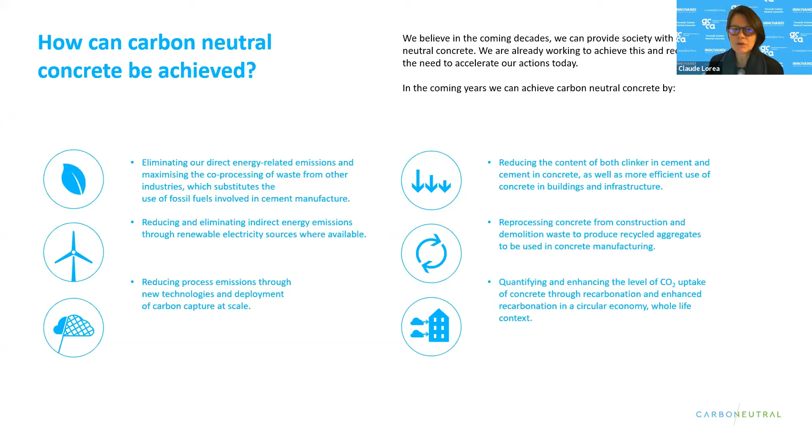Now, recarbonation is something on which we have a lot of research available. Research first, because in fact, recarbonation is an issue that structural engineers have been fighting for decades. So the mechanisms of recarbonation are really well understood, and actually it is something that we wanted to prevent because that could lead to destroying the concrete structure.

And then more recently, there was what I see as a breakthrough article in geoscience, this one showing substantial global carbon uptake of concrete through recarbonation. And I think this is actually the article that triggered the sector to say, well, we have to quantify this and we need to get the numbers right, but we also need a methodology to quantify, a methodology that will be recognized internationally. So the idea was to put together a bunch of scientists to develop a methodology that is compliant with IPCC methodologies and that would be accepted by UNFCCC as recognizing the amount of CO2 that is reabsorbed by concrete.

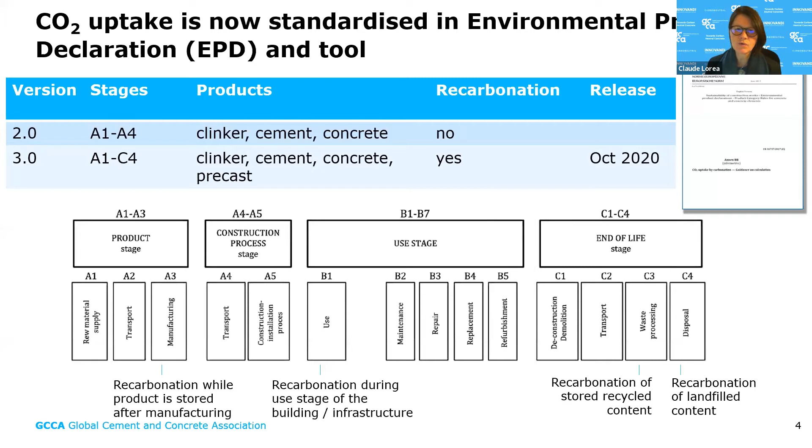So when there is CO2 which is reabsorbed by the concrete, and finally even maybe when concrete is landfilled, which is obviously something we want to avoid. And this is really where we can speak about enhanced recarbonation. So in our roadmap, and we are obviously working on this, it's about increasing the amount of CO2 that can be reabsorbed at the end of life of concrete. And there, concrete recycling is obviously essential.

Now, how does it work with IPCC, and what are we doing here? So the objective, as I said, is to have this recarbonation phenomenon recognized in IPCC, which is the reference for CO2 emission reporting at country level and at global level as well. And it's different, obviously, than having it recognized in an EPD. And we need to ensure that IPCC endorses the methodology so that what we have defined is credible.

So a project was co-financed by Cementa AB, CEMBUREAU, PCA, initially the World Business Council for Sustainable Development and the CSI initiative, and this project was taken over by the GCCA. And I've just made here a quick calculation to show how important that issue potentially is for our sector.

The cement and concrete industry stands today for about 7% of global CO2 emissions. I know there are a lot of numbers out there, but I'm following closely emission inventories and so on, and I published a LinkedIn article last year, and I'm about to publish a new one, and I stick with my 7%.

So we represent 7% of global CO2 emissions. And if we assume that 60% of this is process emissions, then the current uptake is slightly below 1% of total global man-made CO2 emissions. So it is important, but it's important as well that we calculate this right.

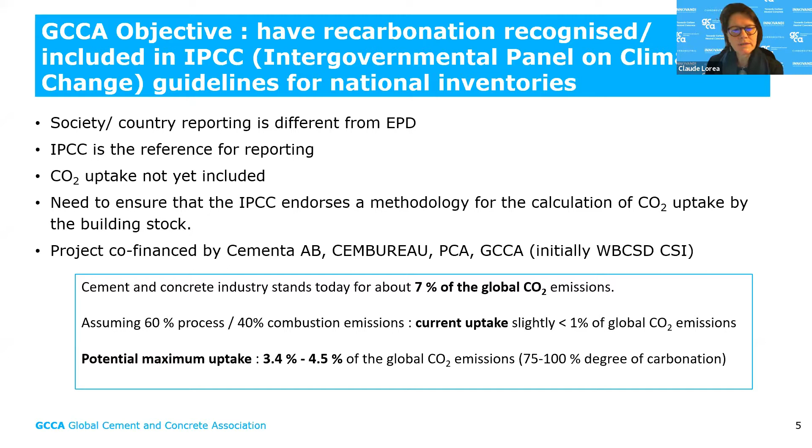The potential maximum uptake is obviously way higher because theoretically we can achieve a 75 to 100% degree of carbonation, because we know that this reaction can completely go the other way around. So the potential maximum uptake is absolutely huge, is more than half of the 7%. So very important issue. So how is IPCC reporting structured? So that's quite important to understand.

So in the IPCC report, the countries will report their emissions and they will report their removals. So in the emissions, they have to report for cement industry separately process emissions and combustion emission. And what I have not highlighted yet is that actually the recarbonation happens in relation to the process emissions. So it's not the combustion emission where the CO2 is reabsorbed, it's actually for the process emissions that we have this phenomenon of recarbonation. This is the inverse reaction of the one that is happening in our kiln, in simple words. And actually those two sources of emissions are reported separately in IPCC guidelines.

This is actually one thing that also leads to a lot of confusion about those 7%, because most people only look at our process emission, or only look at our combustion emission, and not at the whole story. And there basically, we need then to link the recarbonation to the process emissions. And the intention is to do that under the reporting item removals, because it's actually a removal of the CO2 from the atmosphere that is happening.

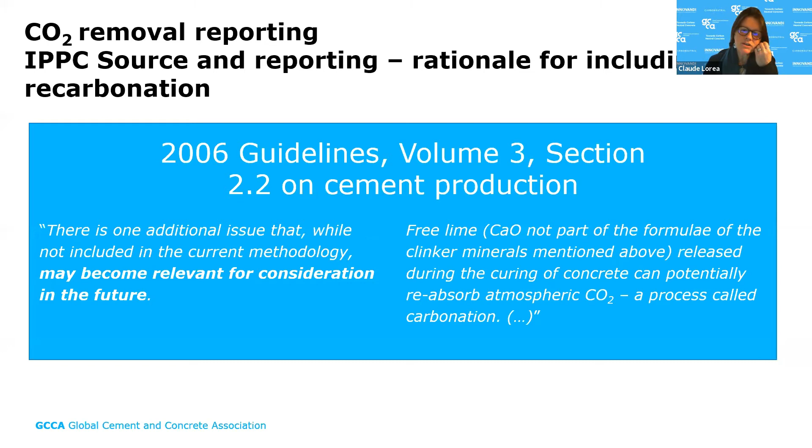And the famous IVL report, which we have had developed in this project, actually offers the 3 tiers methodologies. So you have the tier 1, the tier 2, and the tier 3 methodology. I think the focus now for us is on tier 1. It's already great if globally we could calculate this at the tier 1 level, and then we can start and refine in some countries where we can.

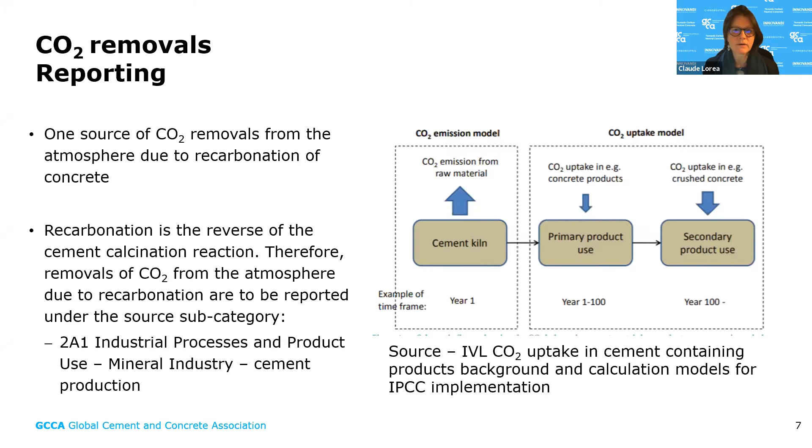So this is to summarize what I explained. You have the emissions in the cement kiln, and then you have the uptake model, and the uptake is both in concrete product and then also in crushed concrete at the end of life. So those are the emissions and uptake, and this uptake is actually the reverse reaction of the calcination reaction that happens in our kiln.

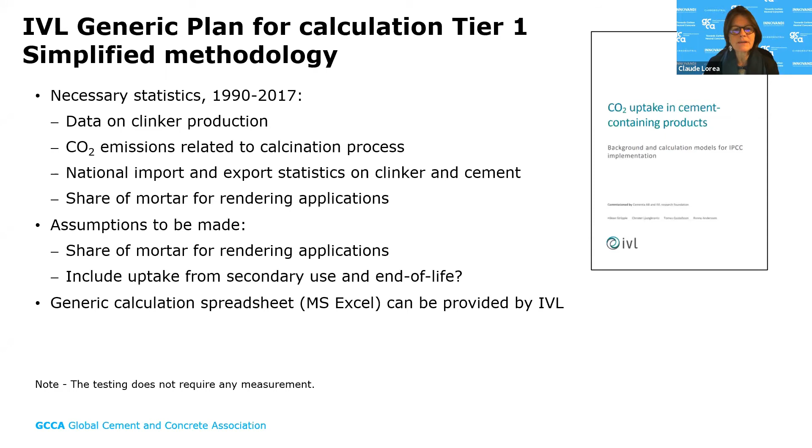And then if you want to refine, you also need to understand where the cement is used, because obviously the recarbonation potential won't be the same for a structural application as for mortar used for rendering application, where the recarbonation is obviously higher. And then obviously the tier 1 methodology also offers to cater for the level of recycling of the concrete, which is also an estimation that needs to be done. So we are now collecting the data, and there will be a spreadsheet, and then we can try to calculate and then start talking to the authorities.

So the tier 2 is a bit more complicated, as I explained. So we would go for a tier 2 in more detail on the cement type, because not all cement types recarbonate the same way. We will go a bit more into the detail of what are the different types of concrete product and concrete used, and what's the amount of cement used in the different concrete products, and then also the surface area and the exposure type per cubic meter of concrete.

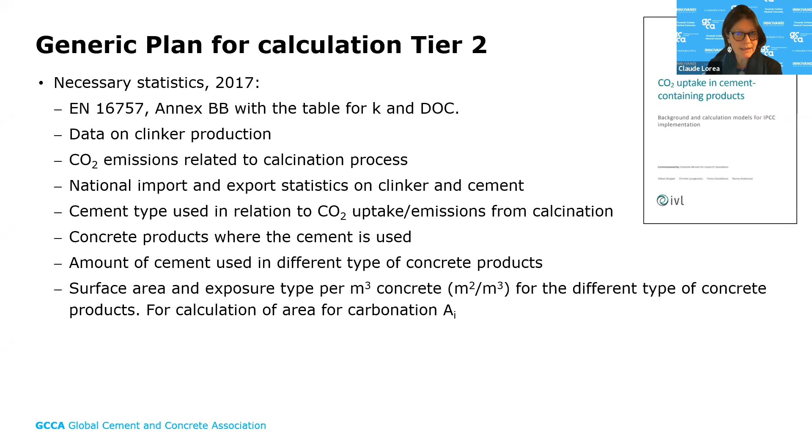Sweden and Denmark are trying to work along a tier 2 methodology. And I'm very pleased to say that Sweden is actually the first country who this year reported recarbonation of concrete as a memo item in their report to UNFCCC. So we already have now one country who has used this methodology and reported it.

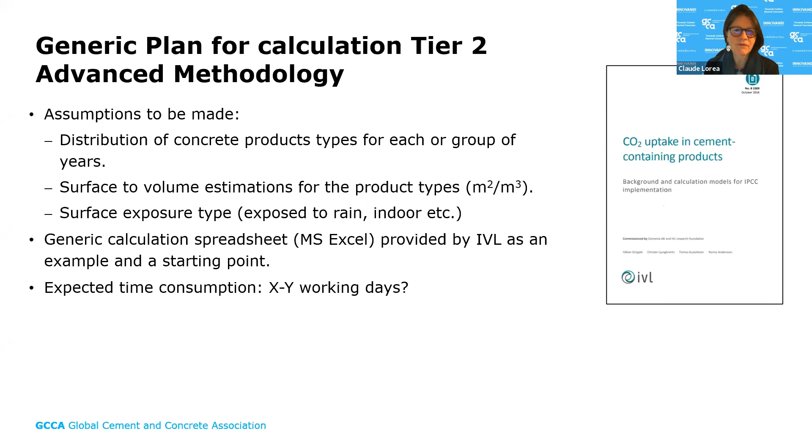So the advanced methodology is even more complicated, so I won't get into there. If you want to learn more about all the details and have the reference, you can just click on the icon of the report here, and you will land on the IVL page. IVL is also developing a web page where you will find a lot of information related to recarbonation.

So to conclude, recarbonation is the reverse reaction of what's happening in our kiln. It's happening, it's true, it's not greenwashing. We are trying to quantify this on a scientific basis and have it recognized. If we push this further and we go for enhanced recarbonation, then we could even talk of a CCU option, which is actually also compared to what Magali showed amongst all the use options we have.

If you look at using the CO2 to produce a fuel, for example, in that case, the CO2 will be released. So if the CO2 is used to produce a fuel, at best you have a half reduction of the greenhouse gas potential. When CO2 is stored in the concrete, it is stored there for time periods that are equivalent to geological storage. So the CO2 is stored forever, I would say, in the concrete. So it's a use option, but it's a true storage option.

And then let's also not forget, I love to finish on this, that concrete also delivers savings in our lives: transport, infrastructure, energy, buildings. So there are more savings, or more carbon removals, than just the recarbonation of our beautiful artificial stone.

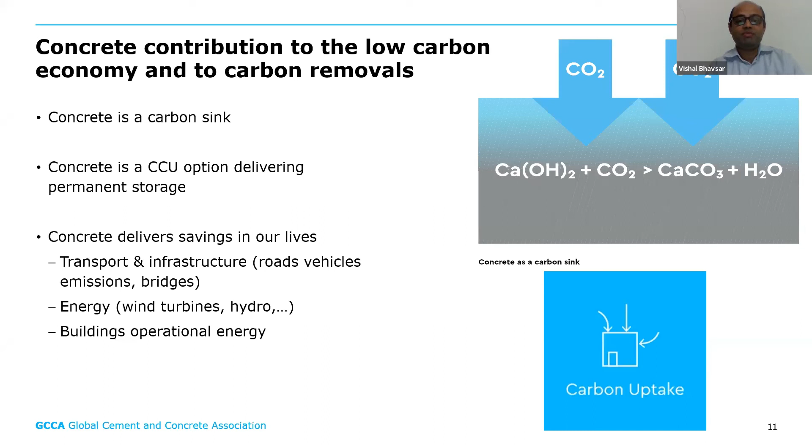There have been several questions coming in, but there is one theme of question which is about what steps have the association or other stakeholders taken to get consideration of recarbonation as part of our GHG accounting boundary? And when do you expect clarity from regulators or international think tanks like IPCC or UNFCCC on when recarbonation can be accounted in the net zero accounting for the sector?

It's a long process before we will have it formally in the IPCC guidelines reviewed, not only because we need acceptance, but because those guidelines are reviewed every decade, I would say. So I think it's a medium-term issue before we have it formally acknowledged in IPCC guidelines. It might still be up to a 10 years process before it's there. So I don't want to give you too much hope that it's going to be tomorrow,

but it's going to happen, that I'm confident. But what we need to do now is have countries reporting it, because as I said, we have this door open in the current guidelines. We have a strong case and a strong methodology. And this is why I'm now working on having as many countries as possible doing the calculation and then initiating meetings with their authorities and their experts responsible for reporting to UNFCCC, so that as many countries as possible report this, like Sweden, as a memo item.